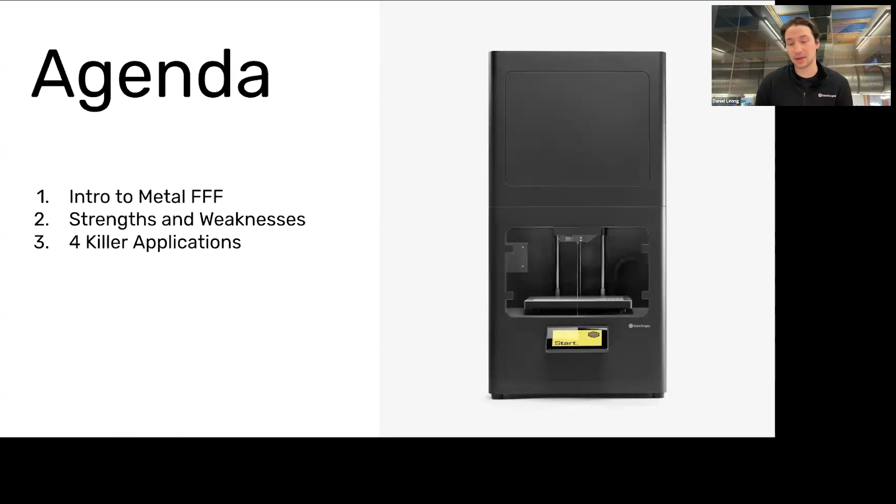So first, intro to Metal FFF printing. Essentially, Metal FFF printing starts with FFF printing, but in reality is a 3-step process.

So you have your printing, your debinding, and your sintering. Before we get into these specific steps, we need to talk about the filament. Filament for a Metal FFF printer is something that needs to have metal inside of it, but also needs to be at least some component polymer, because FFF printers exist by printing polymers out of a nozzle.

The way that works is we use basically MIM feedstock, if you're familiar with metal injection molding. That feedstock is metal powder encased in a polymer and wax binder. It's kind of a two-part binder. The effect is that this filament is actually kind of waxy and roughly polymer-like, although it's not very similar to any polymer you'd conventionally 3D print with. But it's printable through an FFF system.

So the printer itself is essentially a highly specialized FFF printer designed specifically to print this polymer. It turns out that, to make this polymer work, it doesn't take as well to 3D printing as, say, PLA, nylon, or Onyx filaments. So it's a tricky polymer to print. It's a highly specialized machine with a heated chamber and heated bed. When we print it, we scale it up about 20%, and I'll get to the reason for that in a second.

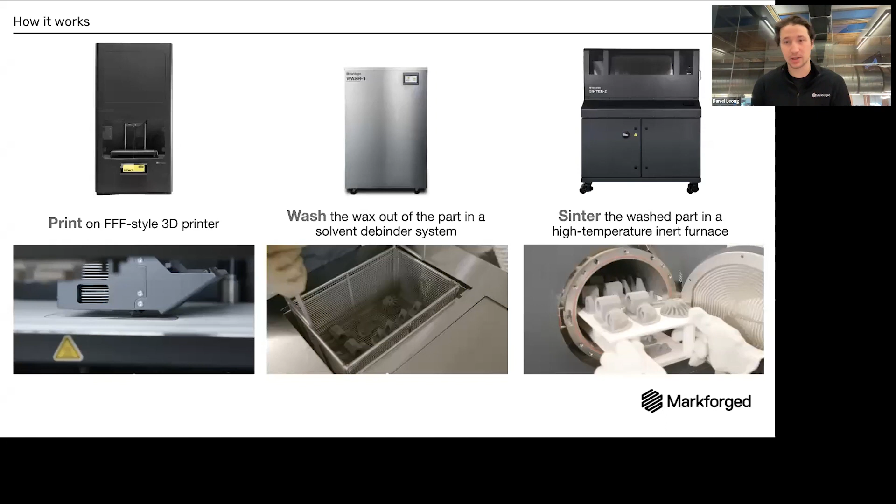We'll get into some print times and time-in-hand for print, wash, sinter for some parts in a bit, but that's an idea of the process.

So why does this process exist in the first place? There are metal printing processes that are honestly more precise, that can print larger parts, that can print more intricate parts - all that stuff. What this has over pretty much every other metal process is safety, affordability, and accessibility. So what do I mean by that?

I mean, firstly, this is one of the very, very few metal printing processes that doesn't use loose powder. We have powder in this process, but it's bound. So you don't need to deal with any safety equipment, special material handling, all that kind of stuff. It just behaves like a filament while you're doing it. So that's a huge difference.

The EHS requirements for something like this are fundamentally less constrictive than those for a powder bed system or a binder jetting system, or even a wire feed DED system, which are maybe the only other systems out there that typically don't use powder by themselves. So that's the first thing.

And the second thing is affordable. Metal printing is pretty fundamentally unaffordable as an idea. Most metal printers are going to run you at least $500,000. And then when it comes to building out a special room and hiring someone to use it and doing the installation and maybe doing all that stuff, it's realistically a 7-figure expenditure. So if you're buying metal printing, you either have a really sewn up application for it, or you're someone who just has 7 figures lying around, which there are people that do, but that's not most people.

So for this printer, it runs about 200 grand, and that's including everything, install, that stuff. And that's still a pretty hefty expenditure, but that's more along the lines of what a CNC mill costs than what house-sized manufacturing equipment does. So because of that, now everyone can acquire this.

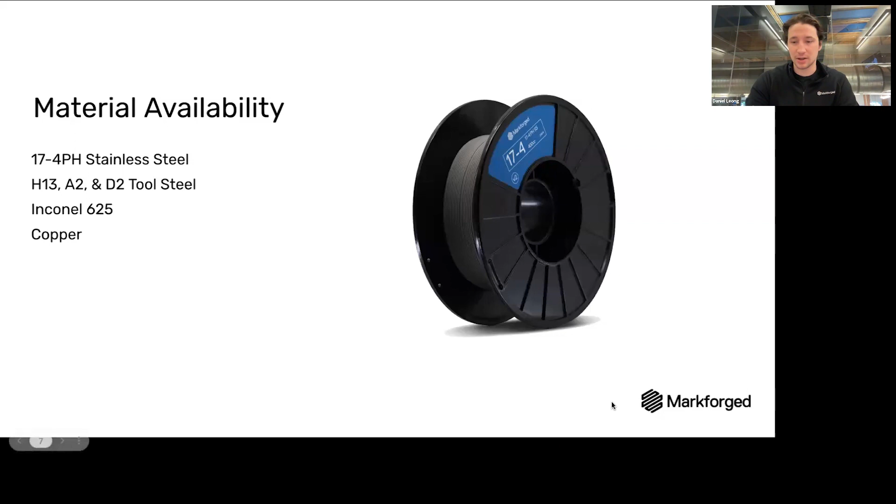We talk about material availability. We'll keep it simple. We do 17-4PH stainless, A2, D2, and H13 tool steel, Inconel 625, and copper. So we have a pretty wide suite of materials when it comes to functional applications. There's a couple of things that we'll kind of look to add in the future, but from that perspective, we see pretty broad usage. 17.4 is kind of our main material, our flagship material. We see a lot of people use tool steels, and then Inconel and copper have some really interesting and powerful applications on their own.

So that's kind of the system at a glance. Now I want to talk for a second about kind of what we mean by Swiss Army knife and then strengths and weaknesses. So first, strengths. Oh, I think I skipped a slide. That's what happened. So why do we call it a Swiss Army knife?

So there's kind of three reasons that go into this. The first one is that it's really good at solving kind of a wide variety of problems. It can do large blocky parts. It can do relatively intricate parts. It can print with a bunch of different materials. So in terms of the number of problems that a single machine in your shop can solve, this thing is up there. It's really, really, really capable.

And also the problems it tends to solve are sticky ones. So like printing copper and Inconel, those are not things that a CNC mill likes to process. So same with tool steel. So it's capable of doing a lot of really interesting things.

And it's fundamentally more accessible. It doesn't sit in your pocket like a Swiss Army knife does when we talk about it in comparison to a DMLS machine. It's really accessible.

But the big caveat with a Swiss Army knife is you're carrying it around, and like if you look at the scissors on that Swiss Army knife, if you need to cut something small, those scissors work. If you need to cut like a ream of paper, those are not the right scissors for the job. And so the thing about the Metal X that is challenging for people to understand and for people to adopt and find great applications for is that it is often not the best tool for solving a specific problem.

If you are looking for the most highly optimized way to solve a problem, the Metal X often is not it. What it is, it's a really good way to solve a bunch of problems, and it can solve them cheaply and affordably. We'll show you some applications later where it's distinctly the best tool. But a lot of these parts you could machine, broach, cast, or do all kinds of other fabrication. The reality is those methods might not be realistic for what you can actually accomplish in the context of your application or business requirement.

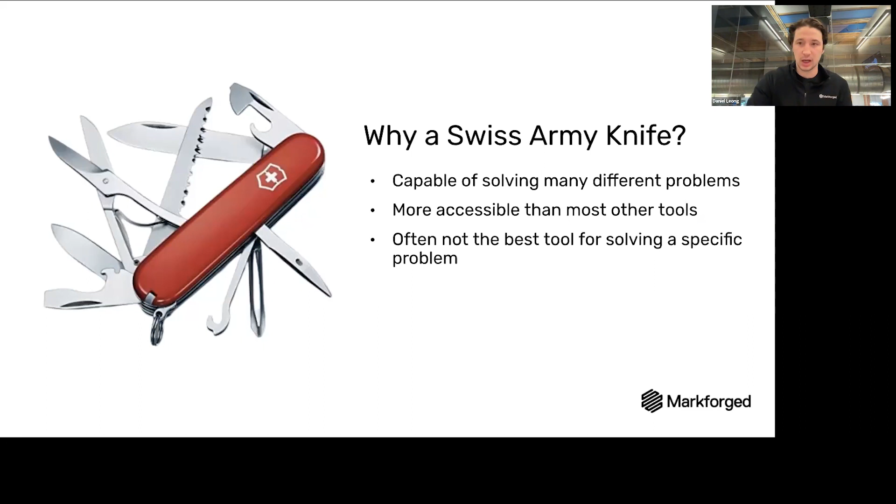In terms of strengths and weaknesses, there are three things the Metal X really excels at. The first is low volume. We have people using it for production, but mostly for a few parts, 1 to 2,000, and 2,000 is really stretching it depending on part size. It's an FFF printer, and nozzle-based printers are constricted by how fast they can put material out of a nozzle. That's a forever weakness of a system like this, but a strength if you need to make a few parts, because it's cheap to do without requiring tooling or anything special.

The second thing is for single parts, it's really fast. It can deliver parts in as fast as a day with an accelerated process, but realistically most parts take about 3 to 4 days. That might not seem fast compared to a mill, but realistically your CNC facility has a queue, or you're sending it to a third party, or you need tooling for a complex part. So while machine time might technically be slower, the reality of getting a part in hand is often faster.

The third strength, alluded to earlier, is complex and high mix parts. Customizability is a big thing here. We'll talk about prototyping and how you can parallelize design progress with a system like this. But the big thing is no tooling, and complexity, if it's printable, is free. Adding a feature isn't something where you have to think about machining time, labor, difficulty, and all that.

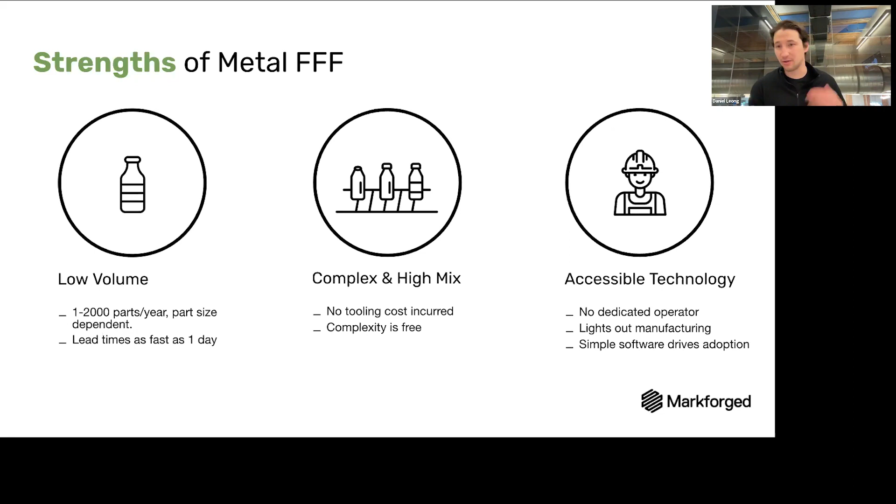The last one we've already talked about a lot: it's accessible, with no dedicated operator needed. It manufactures overnight and on weekends, doesn't need supervision while in process, and it's simply a piece of software. That's the starting point of why it's good.

So why is it bad? Kind of the opposite of what we just talked about. High volume and low mix is just fundamentally not for this. We have our new binder jetting system from Digital Metal, the PX100, which I'm sure you'll hear much more about in the future. That's much better for high volume, low mix. If you're thinking thousands, that's within scope for it. But if you need to make thousands of parts a year, this machine just isn't fast enough. You can parallelize machines and build a big print farm, but at that point you're stretching the limits of the technology.

When we talk about high mix versus low mix, we mean part variability. If you're making 5,000 of the same part, that's low mix. If you're making 500 SKUs with 10 of each, that's high mix. Low mix is not great for this printer; high mix is really good for it.

Precision tolerances are key. We talked about shrinkage—this machine can hit certain tolerances depending on the geometries, and you can easily post-machine, post-grind, or post-process parts to hit tight tolerances. So if you have something with a couple tight tolerances that's mostly near net shape, that's fine.

What you can expect is that the off-machine tolerance of this is not going to be anywhere near what you'd expect from a CNC mill. Some people tend to print very complex geometries or thin features, which are some of the least accurate things this machine can print, and then they expect tight accuracies - that's tough. It's just not realistic to expect with this process, and that's okay. It's kind of a process constraint to make something accessible and relatively easy to use and safe. Sometimes you trade things off, and tight accuracy is one of those things.

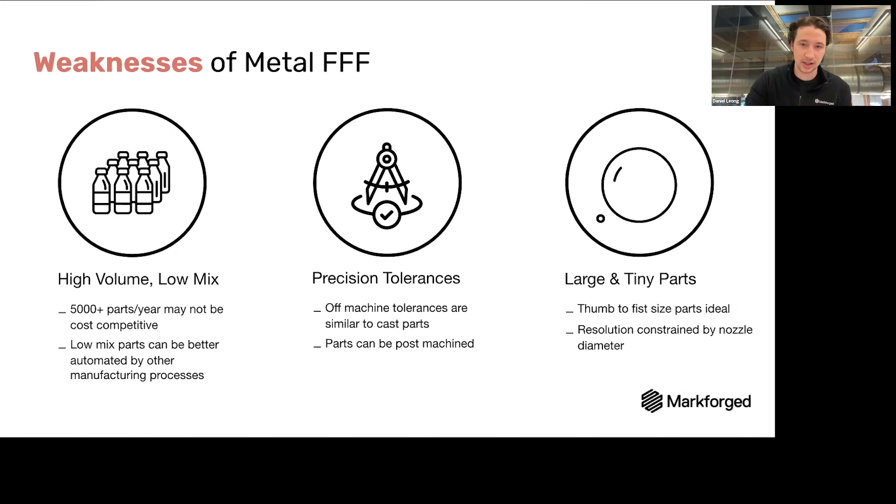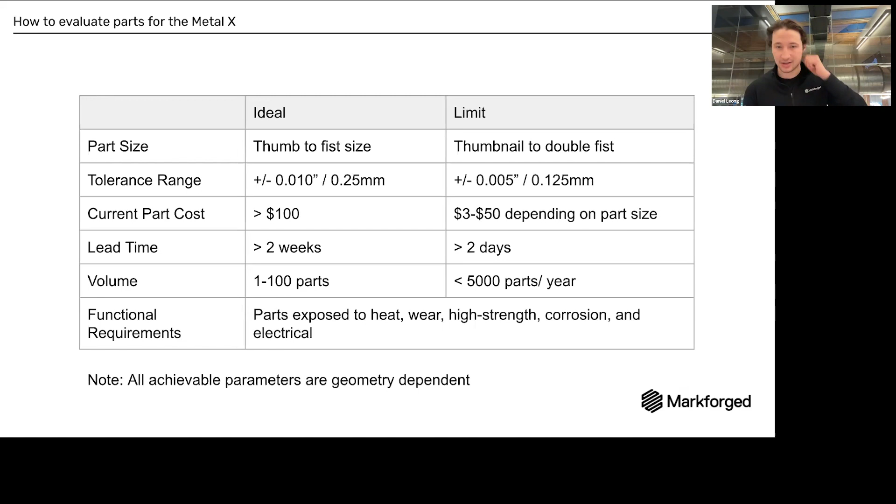This is a bit of a summation of what I just talked about. If you want to screenshot a slide, this is probably the most useful one, as a guide to what works and what doesn't. What we mean by ideal and limit is what I just described - ideal is what we think the wheelhouse of the machine is, limit is generally what it's capable of. So you'll see parts much smaller than thumb size that work great, and parts larger than fist size that work great, but they're not necessarily in the wheelhouse. Then we talk about tolerances - we're near net shape, but in some areas the tolerances can be a lot better than that. If you want to look at this, I'd recommend screenshotting it and looking later, because I don't want to go through the big table - I have more fun things to talk about.

One of those is what I call the X factor. We talked a little about speeds and feeds in terms of what this is good and bad at. If you've seen me present before you've maybe seen this slide, but I harp on it because I think it's really important. This is one company's example, but we've seen this with just about every company we've talked to: one of the biggest things about bringing a metal 3D printer in-house is that it actually empowers your employees - not just your shop employees or your CEOs, it's top to bottom.

If you look at these quotes from top to bottom, the CEO talks about how it's removing bureaucracy and adding autonomy, which is good for him. The director of engineering talks about how his engineers are more invested in the tasks they can do because they're able to see the results and have more granular control over what they're designing and how it's being made. And then the model maker - people in the shop who were previously nervous about this taking their jobs - suddenly become one of the biggest advocates for this because it ends up making their job easier.

I think we're well into this back-inshoring of parts and processes. One thing you see is there's more work than jobs to be done, and more work than people to do it. So if you can have something that helps you be more efficient, it ends up being better for you in the long run.

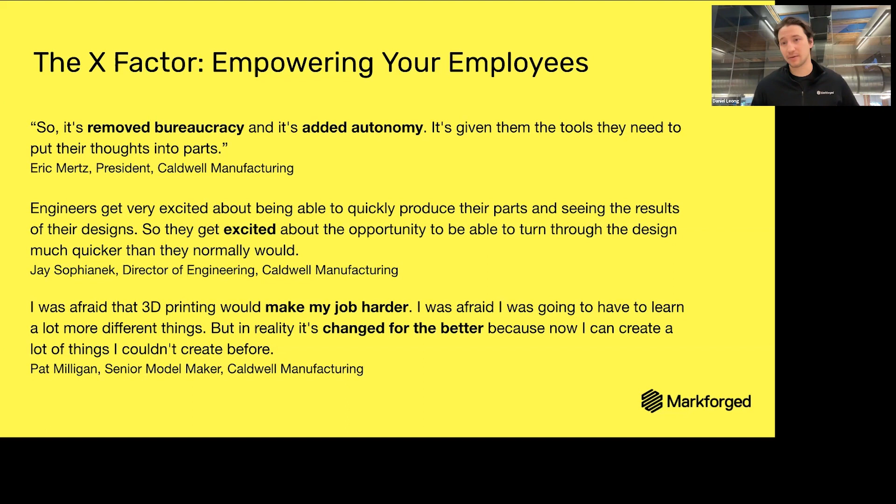So that's enough about strengths and weaknesses. Let's talk about some killer applications now.

Before we talk about applications, I want to touch briefly on a heuristic for how we think about this. First, what is a killer application? You'll hear every salesperson and anyone talking about 3D printing mention this all the time. As it's defined, it's an application that's fundamentally indispensable, so effective there's no reason not to do it, and so vastly superior that it's a slam dunk.

We think about categories for applications here: rapid prototyping, building durable tooling—that durable part is really important—one-off spare parts or MRO replacement parts, and end-use parts. So those are the four classes.

Then we think about requirements. One thing to think about is that one of the biggest reasons to not buy a metal printer is because a composite printer can do the job you need. Composite printers are great for a lot of the things we just listed on the left side—rapid prototyping, making some tooling, MRO, and end use.

But there's a set of requirements that composite or plastic parts just can't match because they're still plastic. It doesn't matter how much carbon fiber you put in a nylon part, it's still based in nylon. So we talk about truly high strength parts, or parts with a lot of wear resistance, heat resistance, corrosion resistance, or parts that are conductive. Those are factors that composite printing doesn't accomplish. Those are places where if you have those hard requirements for your part, you need to go to metal—that's the only way to accomplish your goal with 3D printing.

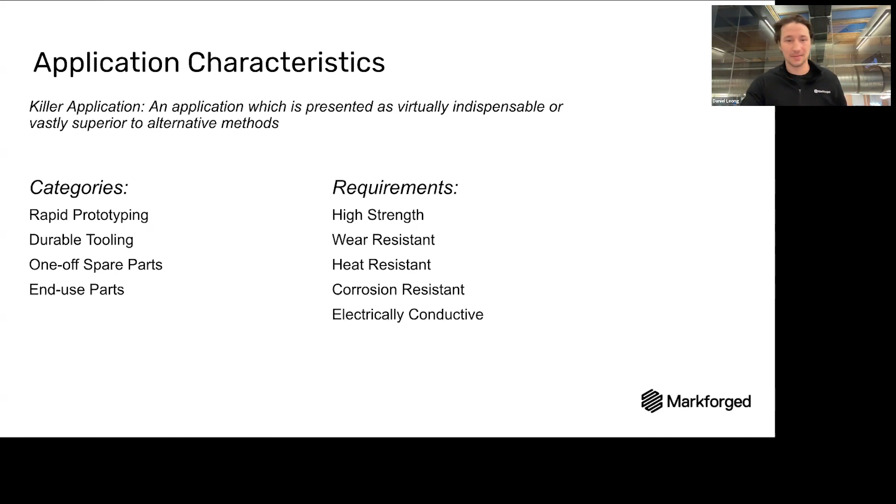So with that, let's talk about 10 cool applications, and happy to answer any questions about these. I know them pretty well—a couple Ross knows better than I do, so I'll do my best. The first one is a company called Caldwell Manufacturing.

This is the company we talked about as kind of the X factor, and this is one of their many applications, but it's my personal favorite. Often 3D printing is cast as a prototyping tool, and people who make 3D printers who want to go beyond that and become production don't love hearing that. The reality is that 3D printing is a great prototyping tool that's also great for a lot of other things.

When we think about prototyping, one thing in the modern era is beyond just being able to produce a part that looks right—what does being great at prototyping actually mean? Caldwell has taken this idea and supercharged what they can do with prototyping.

If you look at the top image, those parts look functionally the same, but they're all a little bit different. And if you look at the bottom part, you can see tons of different little pieces of hardware, printed out of both metal and composite parts.

What they realized pretty quickly is that they can totally reinvent their prototyping cycle. They have something like 100,000 SKUs in their operation—they make windows and doors, with tons of tiny parts and a lot of customizability. So they need to get from idea to part signed off as soon as possible. Before, they would have to send parts out to their machinists, bring them back, send them out, bring them back.

That iteration would take weeks and weeks, and stretch into maybe even a quarter for them to actually get something right, and thousands of dollars. What they realized with 3D printing is these parts are materially dirt cheap, and they don't take that much time to print.

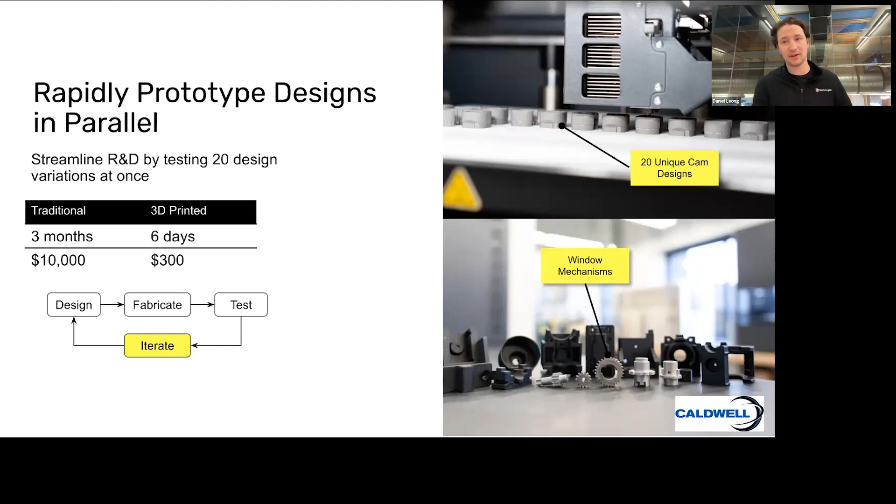Moving from prototyping to tooling, a lot of prototyping stories sound the same, so we won't belabor that too much. This is a classic example where a high power composites user finds the logical end to using composites, and then figures out that metal is the right way to go.

These robotic grippers are gripping the inside of threads, which are fundamentally abrasive, especially on cast parts. And the result is that even though they're reinforced with, I believe, fiberglass or carbon fiber, it doesn't really matter which, they wear down.

We're not talking on the order of 20 cycles, we're talking on the order of 10,000 cycles. After 10,000 cycles, these grippers are rendered non-functional because they just don't have much to grip anymore. They're totally worn down to the studs.

That's fine, 10,000 is good, but if you're making several thousand parts a day, that's only a few days. So what that means is that despite composite being a great solution for some tooling, for other bits it just doesn't solve the problem.

So what if we print something out of tool steel instead? It takes longer, costs more money to print, but instead of 10,000 cycles, you're talking 1 million plus. This is functionally a tool that will last as long as you need it to.

Suddenly, instead of a consumable SKU for your tooling, you have a tool that lasts beyond what you need to think about replacing it for. That's a huge change, and it's a big way to reduce the number of spare parts you have to keep in inventory. Looks like there's some questions, so I'll jump in for a sec.

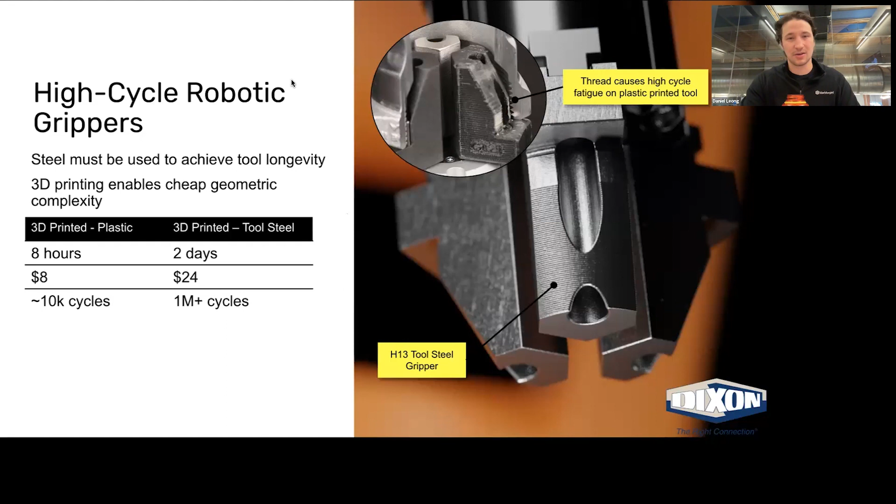Okay, cool. So going from tooling to replacement parts, this is a great example of kind of like your perfect MRO story. When you think about MRO or a one-off replacement part, the classic example is something that was made a long time ago that's no longer made.

This is exactly that. This is a carburetor for a vintage car. They had two on the car, and one of them was cracked in half and didn't work. For the project they were trying to do, this was basically a service bureau printing for this job shop, and there was no way for them to make that part or machine it that was cost competitive.

So essentially they were kind of stuck. They had no way to replace this part. They could have maybe jury rigged something, but it probably wouldn't have worked.

In comes 3D printing. The interesting thing here is that what they did is first they scanned the part, the one functional part. They then printed it out of onyx or plastic to see if it would work, meaning they could bolt the part on as a looks-like or stand-in prototype just to make sure their measurements were right.

They bolted the plastic part on, it worked great. And so they progressed to printing with metal, experimenting with a few different orientations on how to print this part because it's pretty challenging.

It's got a bunch of holes in a bunch of directions. The bottom is a cavity, it's got to be sealed. All this has a lot of requirements. They found one that worked. They printed it, knocked all the supports off, tapped the holes, put it on, and it just worked.

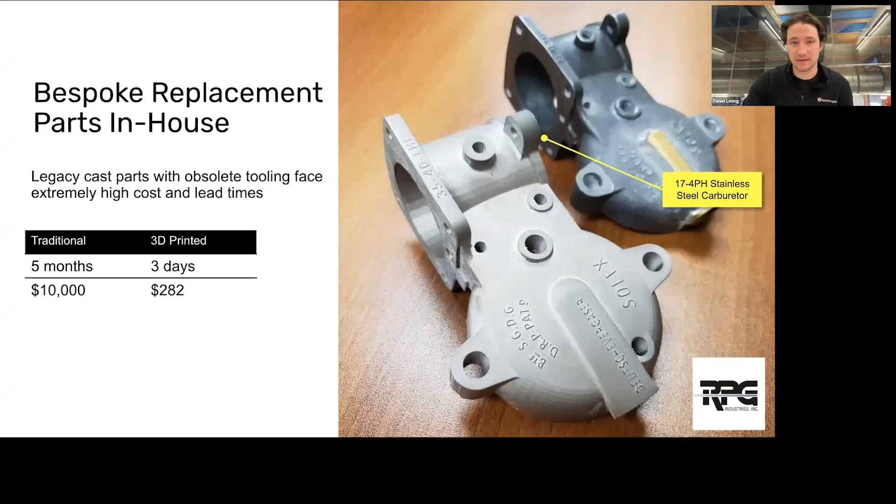So if you look at the left carburetor here, that's the printed one, and the right one is the cast one. And they both work, and this car runs still. So it's a great story of how you can take something you never could have imagined fabricating, or it just didn't make sense to make anymore, and make it.

Okay, so this is an example from something hyper bespoke to something basically something you could buy off the shelf.

So this tool bushing here is a D2 tool steel bushing for a drill jig. And frankly, this is something you could probably buy from a supplier that's relatively standard. You might need to machine a groove in it, or drill it out custom sized, but it's something you can maybe buy.

But the reality is that if you buy something, that takes time, and lead time is time you can't be doing something else. So for a part like this, imagine a scenario where this tool is the thing holding up production on an aircraft or a helicopter, and you need that one bushing to work.

You could either wait 2 days, 3 days, or a week to get it machined correctly, or you can print it and it'll be there tomorrow for $32 and relatively functional.

So it's an example of sometimes your tooling can't wait. And the cost of not being able to do an operation because of tooling is much greater than the cost of anything else. So the priority is time over everything.

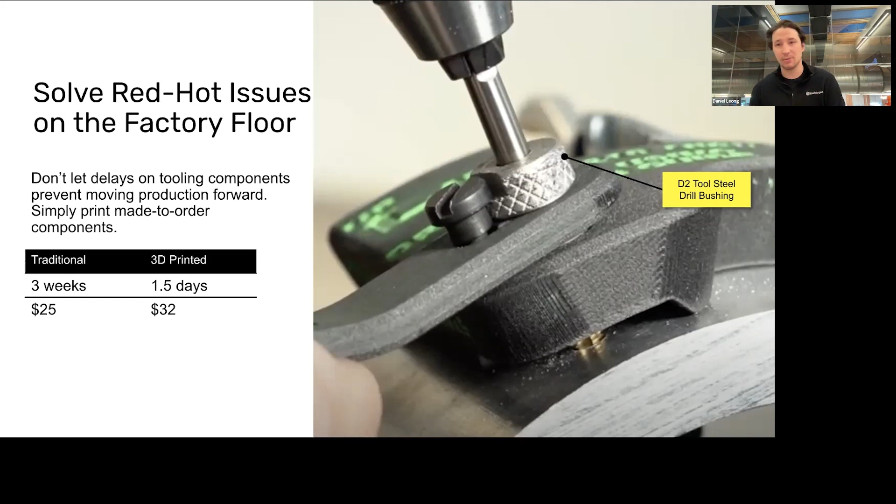We see that the metal printer tends to work really well in scenarios like this, because especially for these small parts, it can deliver them no questions asked in a day or two. And the reality is that there are very few non-standard parts you can get in a day or two. That's a huge difference maker when it comes to keeping your line up, keeping things running, keeping high value manufacturing operations going.

And then from something very standard to something that is super non-standard. I talked at the beginning about how most parts were not the most optimized solution. What we're working with here is parts where this is the best way to make it, but maybe not the best possible version of this part. This is not one of those.

Essentially this is a high volume milling operation. The way they lock their tools in is thermally instead of with a standard chuck. They heat the tool up, it expands into the chuck, and it holds it in. To get the tool out, they need to cool it down.

So the amount of time it takes to cool the tool is the critical element of the changeover time between tools. If you have multiple operations, you need to do this with multiple tools. So this part is called a tool cooler.

Fluids percolate through it constantly, and it's heavily vented, and it's copper in this case because it needs to absorb as much heat as possible. Previously they made these out of aluminum because machining copper is basically impossible. Aluminum is just less good at taking heat off of stuff — it can carry less heat, and machining also limits the number of geometries you can work with, limits the surface area you can have on a part, and limits the internal channels greatly.

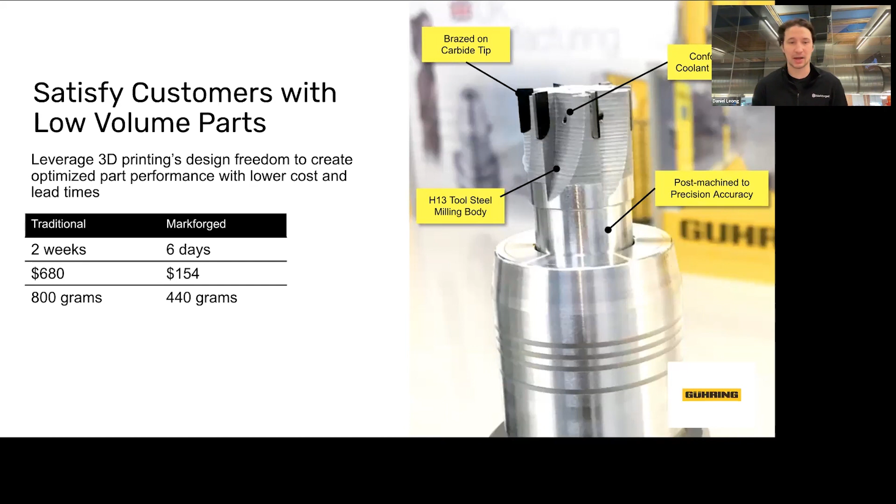So that's a super specialized tool that functions as an end-use part. This is basically a very simple tool that ends up being most optimized to 3D print with both composites and metals. Earlier when we talked about the end of arm tool, we mentioned replacing composites with metals. In this case, what we're doing is combining them to make something that's more optimized than either tool itself could be.

Previously, they were machining these whole big bodies out of tool steel, and one extenuating circumstance that caused them a significant failure was that the machine failed. It went past its boundaries and crashed the tool into the end of the machine. Because the tool is tool steel, it basically broke the entire machine. Imagine running an end mill into the stage so hard that you break a spindle. That's basically what happened with this tool. And so they were searching for two things.

They realized that composite tools by themselves were not durable enough to do this operation many, many times. But they also realized that they would prefer the tool to be the failure point, not the machine itself. So they designed a multi-part composite appendage that is strong, but will still break before the machine itself.

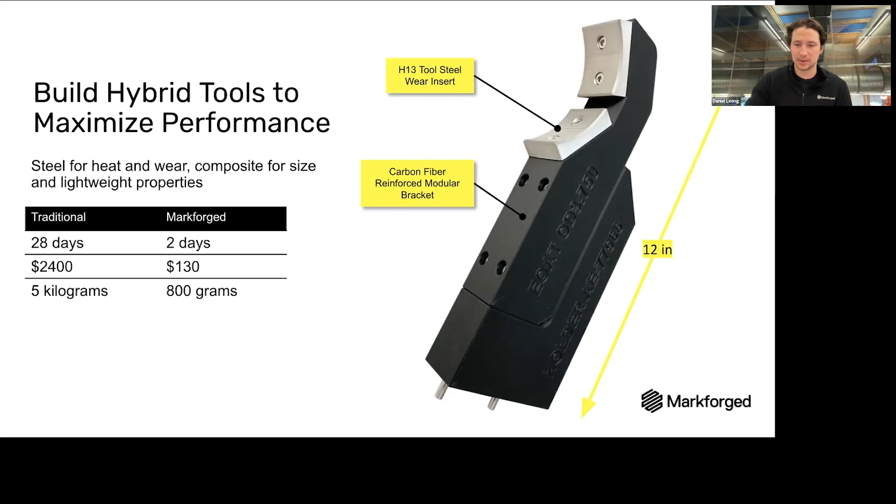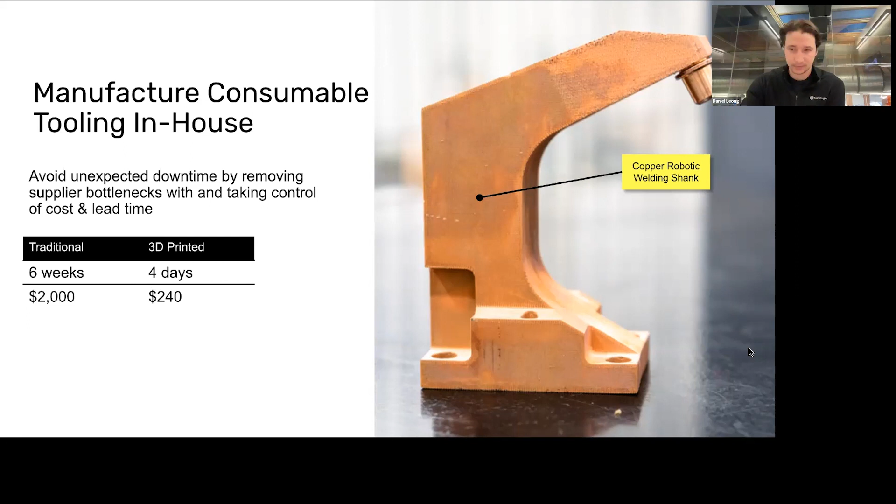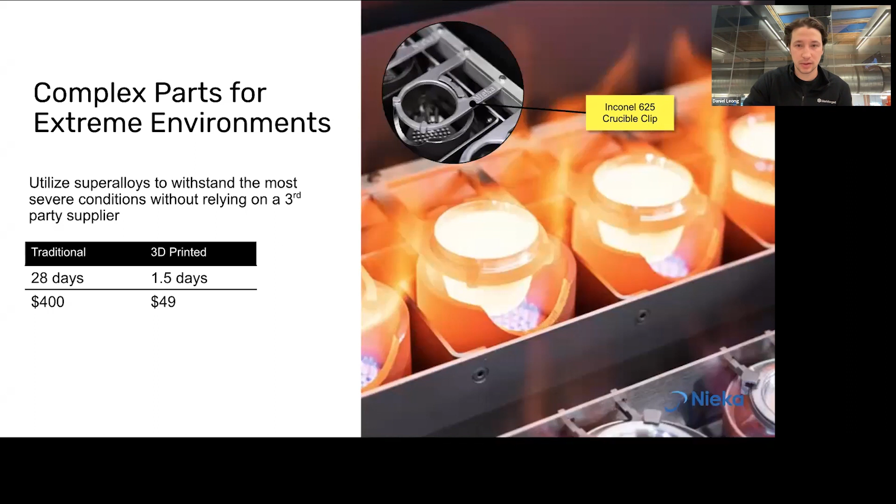Okay, hopefully it doesn't double. All right, so then this is the last one. This one's my personal favorite because it's just the strangest, but one of the most interesting applications that turns out to be just a total slam dunk.

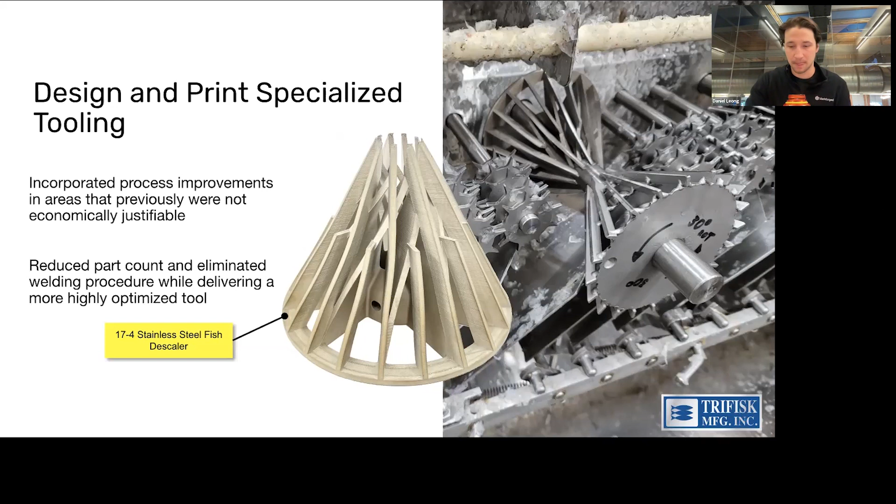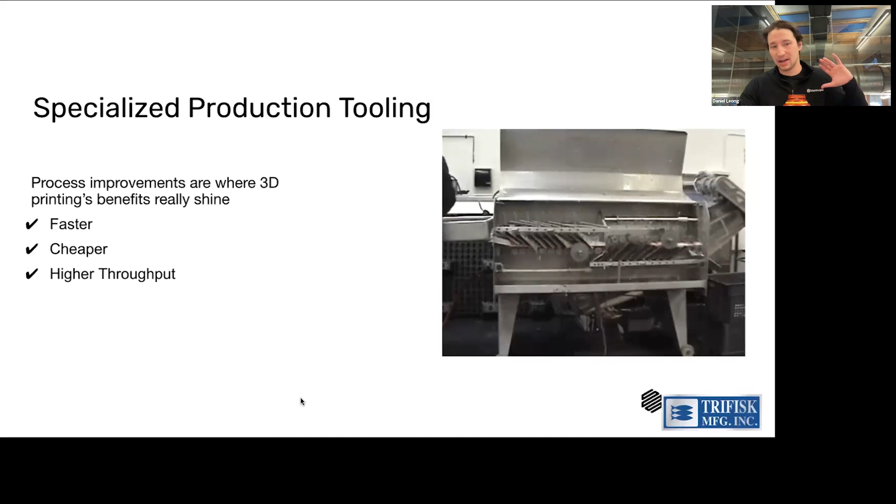So yeah, so this is the actual machine. You can kind of see the spinny bits. These things are spinning at ultra high speed, and that's actually the part itself. It's faster, it's cheaper, and you can make more of them more easily.

Before I answer some questions, I want to pose this as kind of the last challenge or so to ignite questions and ignite thought. So what makes a successful manufacturing company? There's myriad things. It's not like there's a single thing, but one thing that Ross and I really agree on is that there's two kind of tenets that we see that unite the most successful manufacturing companies that we work with.

The first is that companies make products with the best user experiences. And when you make the product with the best user experience, there's no way to luck your way into user experience. It takes creative designs, it takes iterating over and over again to make sure something really works, and it takes de-risking to find your failure modes and take them out. The nice thing with user experience is that it's not really only a savant designer designing something perfect. It's a lot of hard work and iteration to make something that really works over a long period of time.

The other side of it, the much more operational side, is companies that make products with the highest cost efficiency. Who is the best at making a good product cheaply for them? If you make it with higher cost efficiency, you can charge less for it, you can make more money, your margins can be higher. There's tons of ways this helps your business.

We see that these people need custom tools or novel ways to make parts. They automate processes where they can, but they make sure the automation they're working on is robust, not flimsy and only optimized for the edge case of when it's going to work. They're obsessed with continuous improvement, always finding ways to make something a little bit better on their line. It's never a finished article.

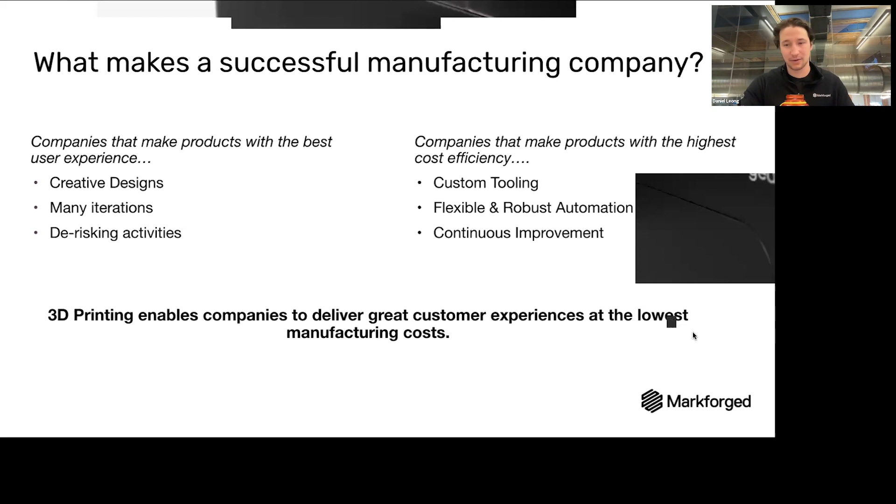If my thing agrees... oh my gosh, it's clicking weirdly. All right, let's see if Zoom will handle this for me. Oh man, what is happening? Okay, perfect. All right, so questions.

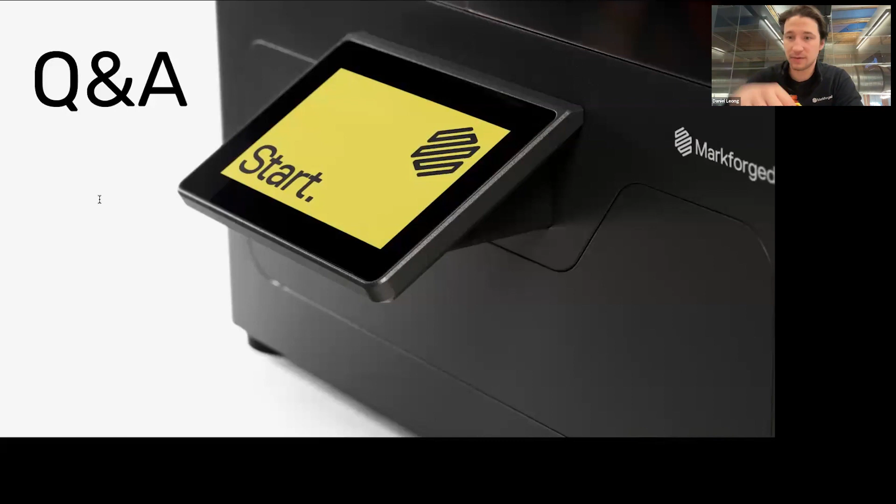Durability of the components we print is on our data sheets. Holding pressures and leak resistance is really tricky with this type of process because you're laying stuff down with a nozzle, so you end up having natural voids. We have been working on leak-resistant improvements, and it is moderately pressure resistant, but it's not something you're going to make a conventional pressure vessel out of.

How often is the wash fluid changed? We have guides for that. It really depends on how often you use it and how much material you're processing, but it's not super difficult to change - maybe once a month or once every couple of months is typical.

Do you have online training for the sintering system? No, it's usually on site because you're doing it when you're installing a machine. We've talked about density and lead times. We're not printing in aluminum, and right now our stuff is not FDA certified.

Are there any installations on yachts? I don't know if there are any on yachts specifically, but we have printed parts for boats of many types. Someone also asked about sintering time, and I'll take that as the last question since we're at an hour.